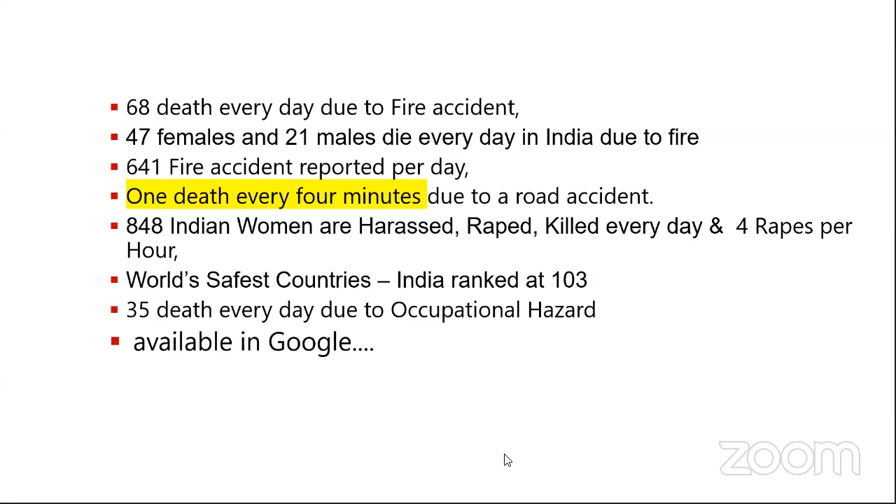And the worldwide deaths due to unintentional injuries are expected to grow by 56% between 2015 and 2030, from slightly over 3 million to almost 5 million people a year. It's estimated more than 90% of deaths worldwide that result from injuries occur in low and middle income countries.

So I always strongly believe safety should begin from home. So if you start implementing these safety plans in your home and emergency safety kits at home, then the country will prosper and the country will become a developed country.

Change should begin from you, ladies and gentlemen. And I'm sure since you are taking part in this webinar, you are a believer of that. No doubt, and ensure that whatever we learn today, it is practiced in our life every day.

Today we have our very important keynote speaker, Mr. V. Suresh, who is very passionate and is a civil engineer from Anna University with over 53 years of professional experience in housing, infrastructure, rural, urban development, and built environment sector. He is the current chairman of Indian Green Building Council and is the vice chairman of National Building Code. The awards and recognition are over 25 to 30, so I've just mentioned a few of them on the slide.

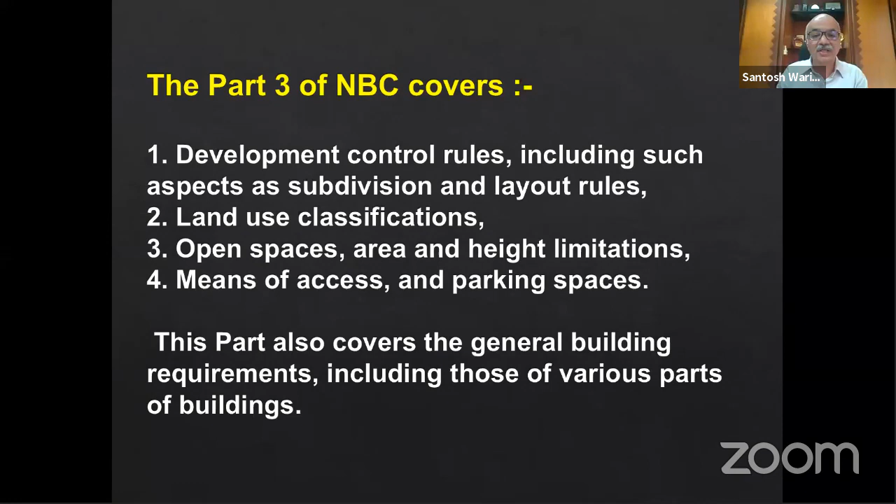The normal expectation of development control rules is to provide guidelines for town planning and country planning so that planned development is possible, so that various authorities working in urban areas get facilities for transportation, amenities, various types of occupancies, reservations. All this is planned by local authorities. The state government has authority as per the town planning acts of respective states to frame such guidelines. These guidelines originate from Part 2 and Part 3, as already highlighted by Suresh sir.

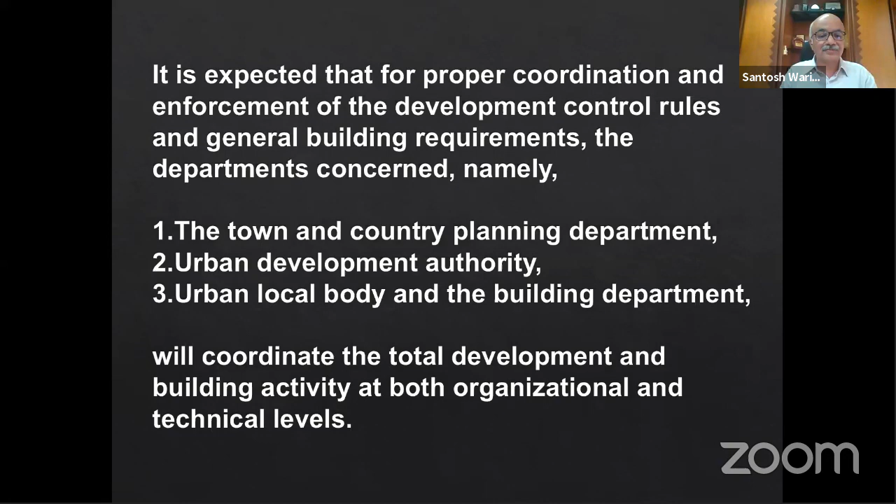The urban local bodies aspect is very important, so that resources available in the city can be accessed with ease, accessible from various strata - right from the poor to the rich, and from different age groups.

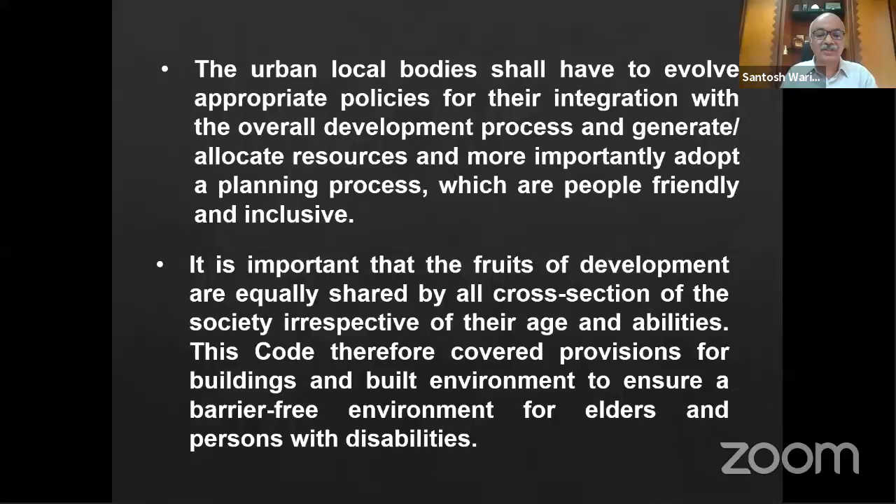Specifically in this new 2016 Part 3 edition, special emphasis is given on the barrier-free environment, built environment for physically challenged or disabled people, with guidelines as per international standards - ISO 21542, 2011 edition. Then the planning a barrier-free environment guidelines issued by Government of India, then harmonized guidelines and space standards issued by the Ministry of Urban Development in 2016.

All these guidelines are incorporated in Annexure B of Part 3 of the National Building Code, wherein barrier-free environment is created for all age groups and disabled people.

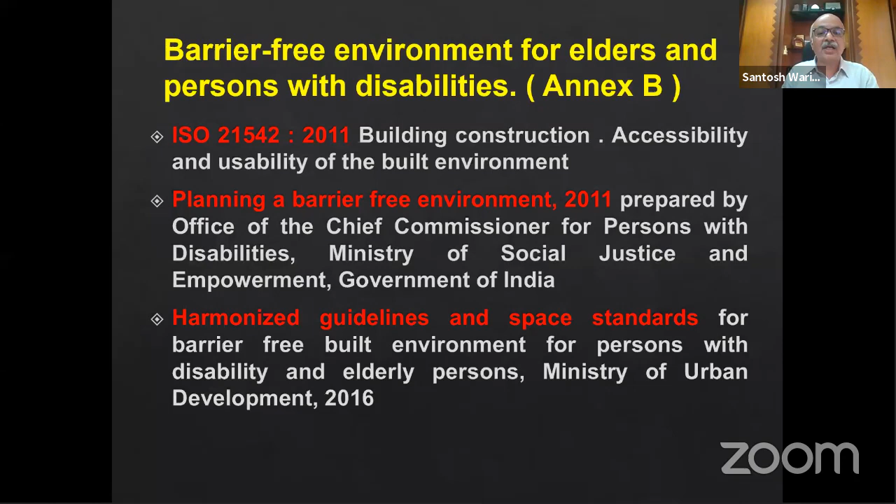Then an important thing nowadays - we are talking about various types of transportation modes, maybe bus rapid transit, metro rail, monorail, ring rail. These are provided or promoted by the state and central government for reducing carbon footprint, pollution levels, reducing automobile use in the city, to minimize environmental impact, and to improve livability and mobility within the city.

So these transit-oriented developments are happening by giving additional FSI around metro rails, monorails or bus transit areas, wherein you can have more parking spaces, more atriums, more common facilities, so it can be easily accessible through this connectivity.

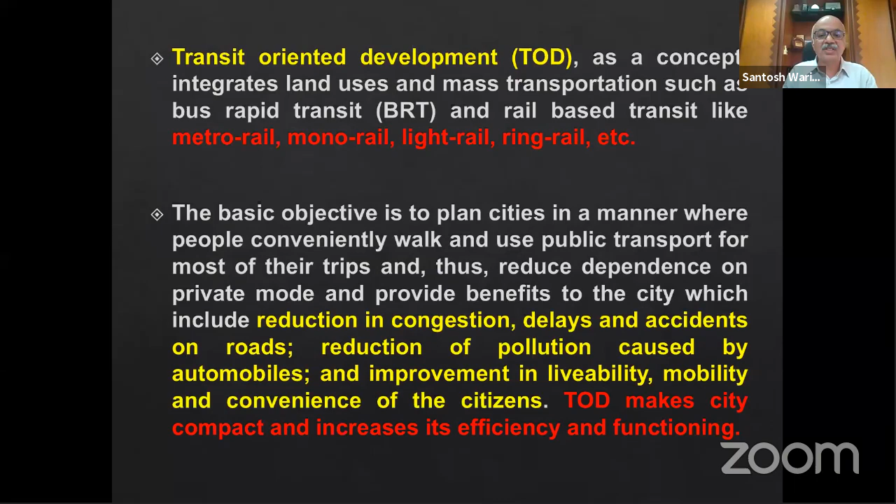Then rapid urbanization - if you see from the 2011 census, 31.16% growth has been seen in urban areas as compared to 27.8% in the 2001 census. And it is expected by 2021 it will be around 40%. So 40% of the population will stay in urban areas as compared to rural areas.

If you see the number of cities, there were 7,933 as per the 2011 census, which will cross around 10,000 in the next two decades. Already one decade has passed. So the population migration from rural to urban is a continuous process due to rapid urbanization and industrialization in the country.

If you talk about mega cities having population more than 50 lakh as per the standards, there are 8 such cities. Other metros, mini metros, with 10 to 50 lakh population, number 45, and 53 cities having above 10 lakh population by 2021 - meaning 53 will come to around 70. These are predictions made considering the urbanization happening across various parts of the country.

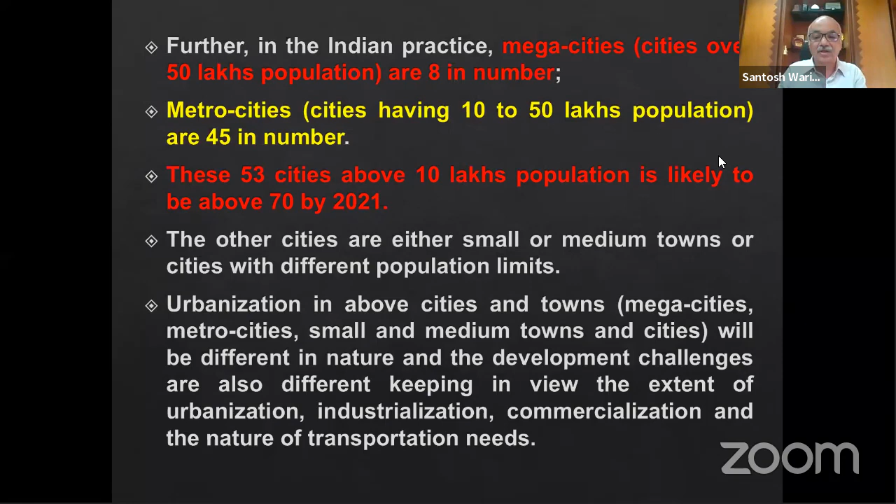So what are the key features already highlighted by Suresh sir in his keynote address - various new things included in this Part 3. The definitions of various terms have been modified. The land use classification has been modified. The provisions of transferable development rights.

This is very important when talking about new infrastructure coming up like metros, underground metros, or other facilities. If the land belongs to some individual person who owns it, and we want that facility on his land, then you have to give him some benefit so that he can use that benefit somewhere else. So every urban local body gives such transferable development rights so the person can utilize it at another place.

The provisions of the podium, which is very important from the metros and mini metros point of view, where parking is a major issue.

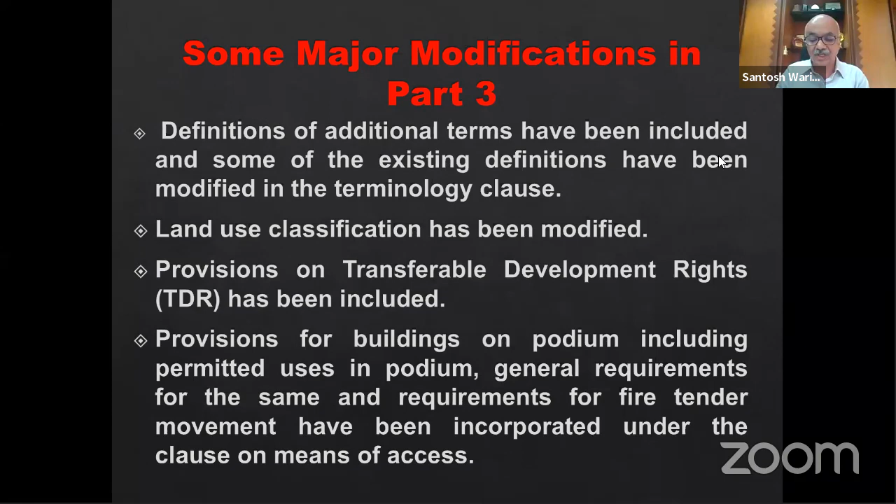Along the metros or monorails, public parking areas are encouraged. So this kind of multi-level car parks and podiums requirements are coming up, and provisions for the movement of fire tenders on and around the podium are incorporated.

The planning norms, new norms, are incorporated. The minimum clearance from overhead electrical lines as per the Central Electricity Authority Regulations 2010 has been incorporated.

Various ventilation, light and ventilation requirements for basements are provided in this part. Then height restriction in the vicinity of aerodrome, that is approach to and departure from the airport - the restrictions within the funnel are given as per the civil aviation guidelines.

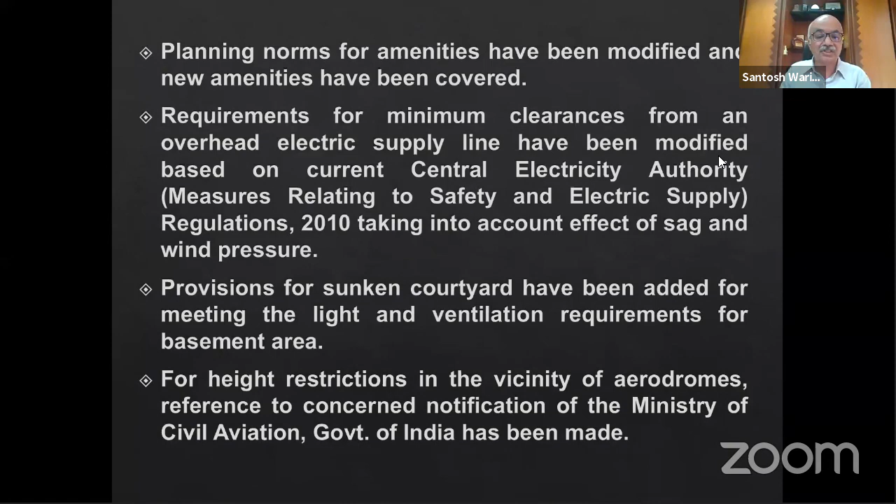Then the provisions for mechanized parking, various types of parking, are provided. Basement use is again modified. The accessibility to the building for elderly persons and disabled persons, that I have already discussed. Solar energy utilization is also included.

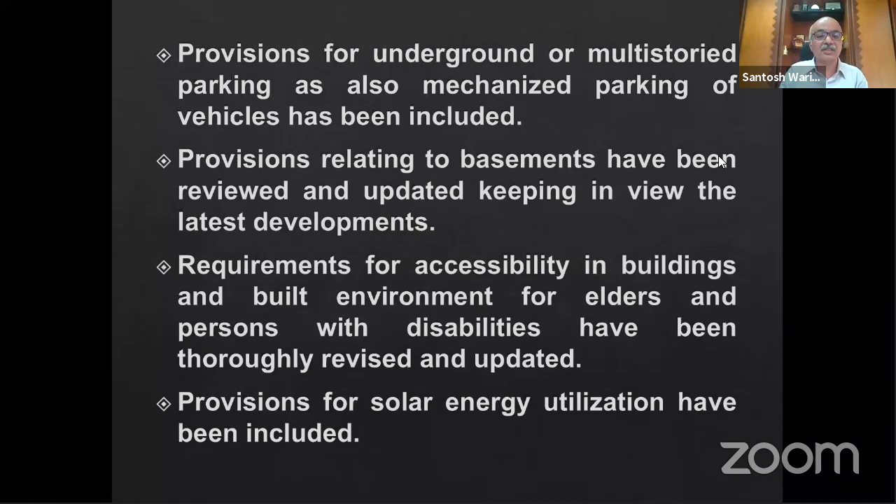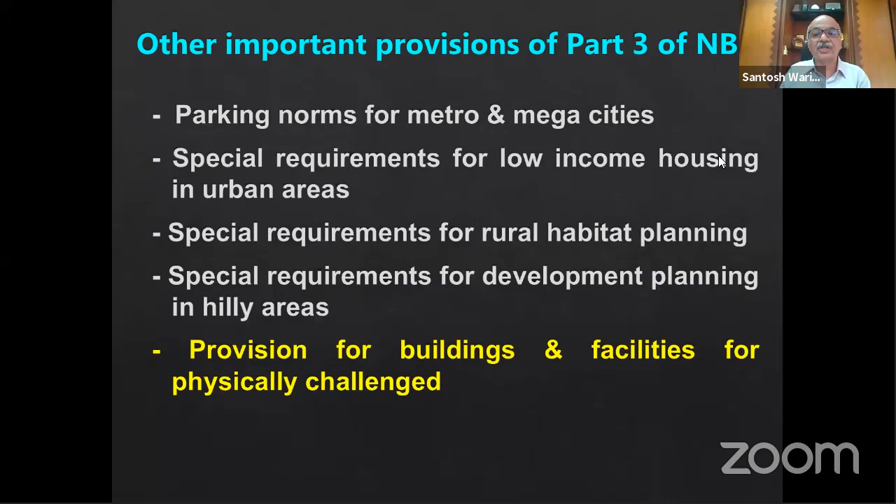Another feature is in the annexures. They have included low income housing in urban areas, requirements for rural habitat, and requirements in hilly areas. So these annexures are also incorporated in Part 3 of the National Building Code.

Now we will see the basic terms used in Part 3. The Authority Having Jurisdiction, AHJ - this is an important feature. It means that by statute, a body has been given powers to regulate development, through acts like the Fire Act, development control rules, or the planning authorities. That is identified by the code as the authority having jurisdiction, and they regulate any development in that particular area.

Then the definition of building height, which is normally measured as the vertical distance from the average ground level to the flat roof or terrace. In the case of a flat roof, how it should be measured is also clarified in this definition.

Then development, which is very important from all disciplines - it is a grammatical variations meaning to carry out building, engineering, mining or other operations in, over, or under land or water, or the making of any material change in the building or land or in the use of any building or land. It includes redevelopment, layout or subdivision of any land, and 'to develop' shall be construed accordingly. This is very important - it covers everything, including below land and below water. So this definition is very clear for development.

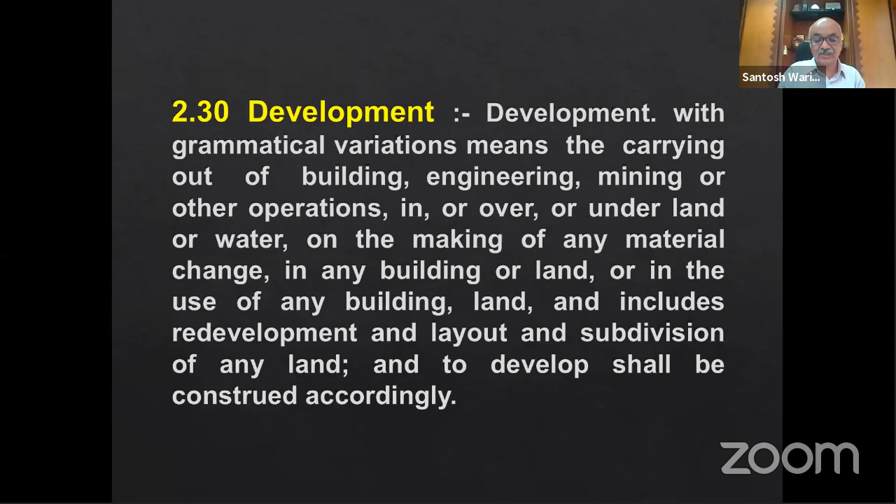Then fire separation, from the fire safety point of view, is very important. Normally architects are taught that the distance between buildings or marginal spaces is required from a light and ventilation point of view. But from the fire safety point of view, as an exposure hazard, it is very important to create distance between two buildings. This distance is measured from the external wall of one building to the external wall of another, so that in case of fire, no radiant heat can pass from one building to another - or in case of industrial explosion, or even residential LPG cylinder blast, it should not affect the opposite or adjacent building. That is specified as already explained by Suresh sir.

Floor Area Ratio, FAR, is given as the total covered area of all floors divided by the plot area. That is the index or code noted as FAR or FSI.

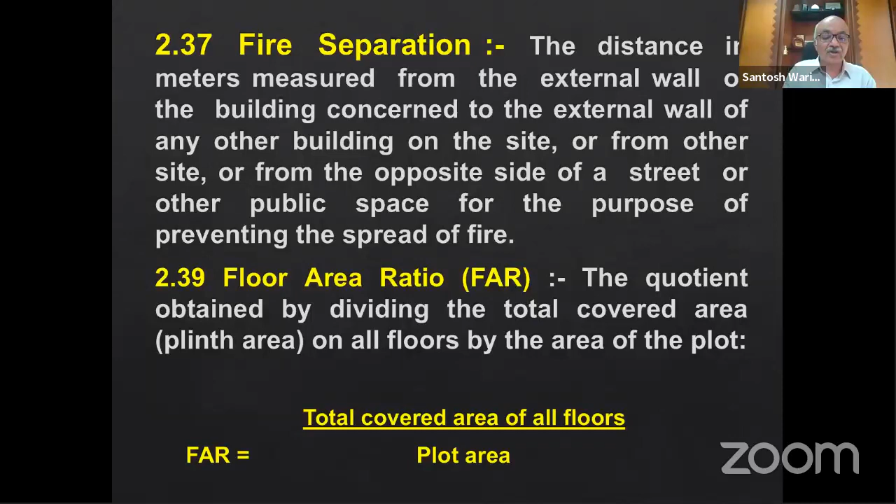The master plan is very important for any town's future development over 10, 20 or 30 years. Considering all development, the master plan is prepared and the state government approves it once published for suggestions and objections from citizens. These suggestions and objections are considered from citizens or expert groups working on the master plan, along with city or town planners, and then the government approves it, and development is carried out as per the approved plan. That is the normal process under any development plan or municipal body.

Every city has got its own development plan, and on the basis of that only the development happens. The occupancy uses are already there in National Building Code Part 4, which provides various occupancies, 9 occupancies and their uses and subdivisions. Similarly, the same is incorporated here. Mixed occupancies are multiple occupancies wherein the occupancies are intermingled, like a mall or a five-star hotel where you have business centers, assembly places, and residential accommodations all together.

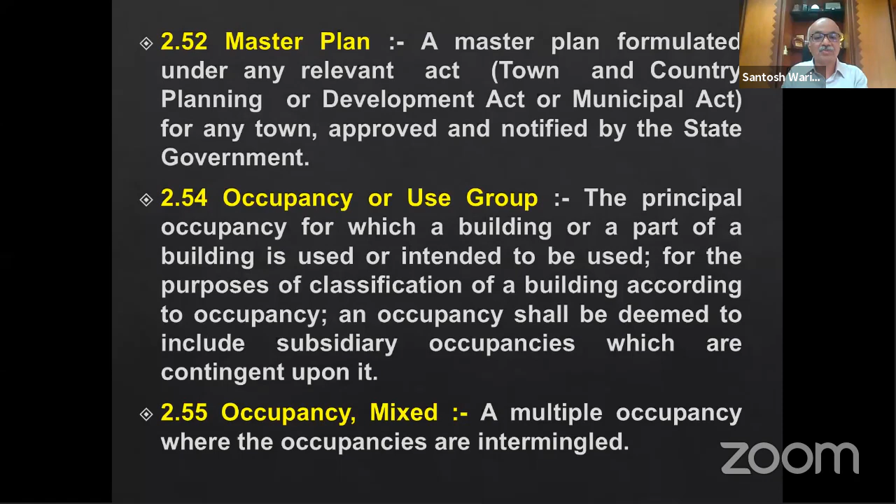Then the plinth area is the built-up covered area measured at every floor level, including basement. So that is basement or any other storey, that is called the plinth area. Setback lines are the lines usually parallel to the plot boundary and laid down in each case by the authority, beyond which nothing can be constructed. So that is the setback area.

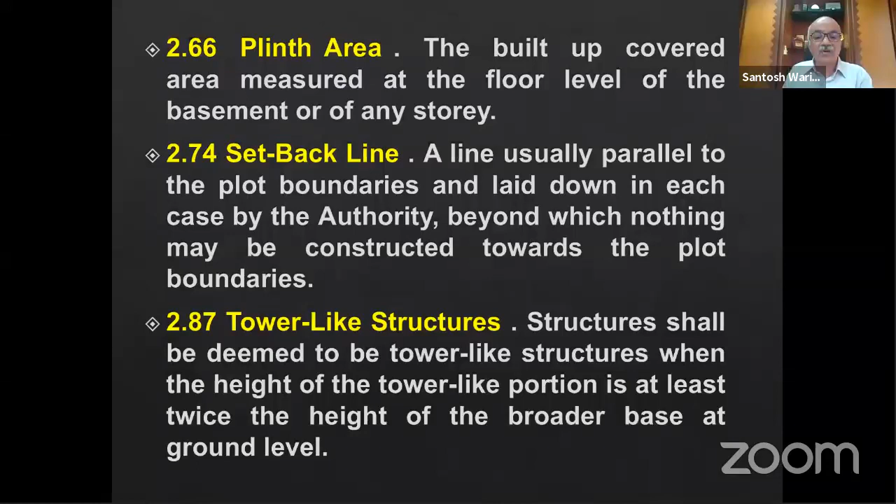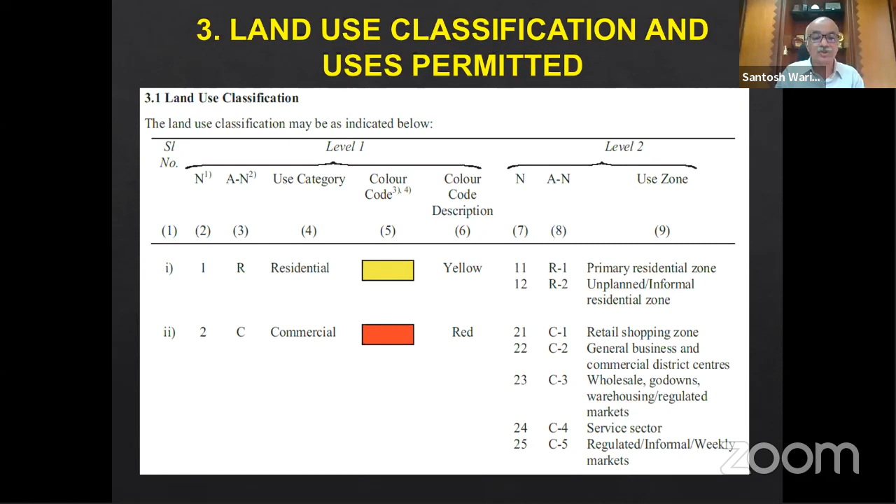Whoever prepares the master layout will show residential in yellow, commercial in red - the primary residential zone, and retail shopping, general business provisions, wholesale, godowns, service sectors shown as commercial in red. Then industries shown in light purple color - light industries, heavy industries, and obnoxious industries - scattered as per the zoning of the city, that is Zone 1, Zone 2, and Zone 3 as provided in National Building Code Part 4.

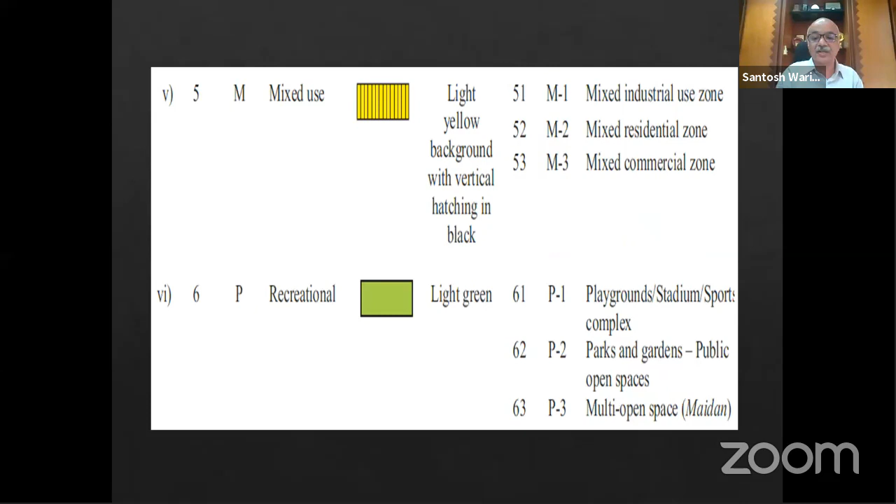Then public and government buildings as dark blue land use. Mixed use is provided with light yellow and vertical hatches - mixed use industrial, mixed use residential, mixed use commercial. Then recreation activities in light green - playground, parks, garden, open spaces. Then transportation and communication with brown and gray - road, bus stations, railway stations, seaports.

Then primary dark green - agricultural or forest areas. Then light blue color for water bodies, lakes, and everything shown in light blue. Special areas are provided with pink color, for heritage activities and government restricted areas such as defense areas.

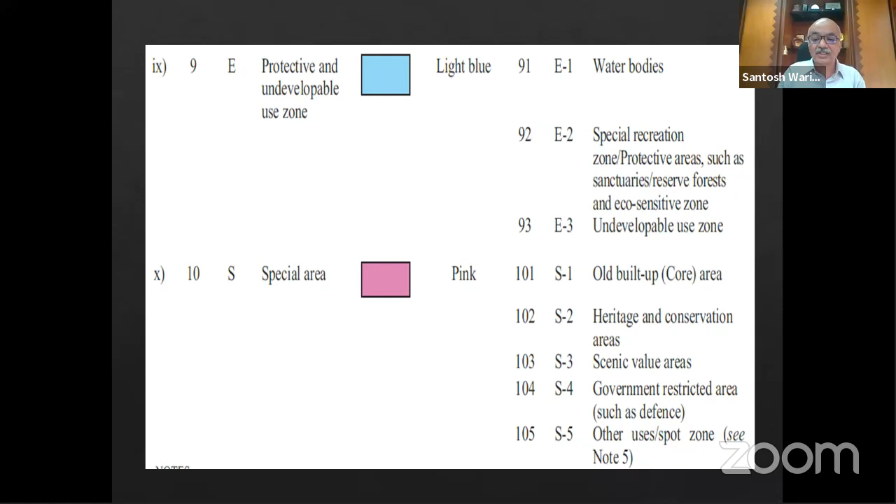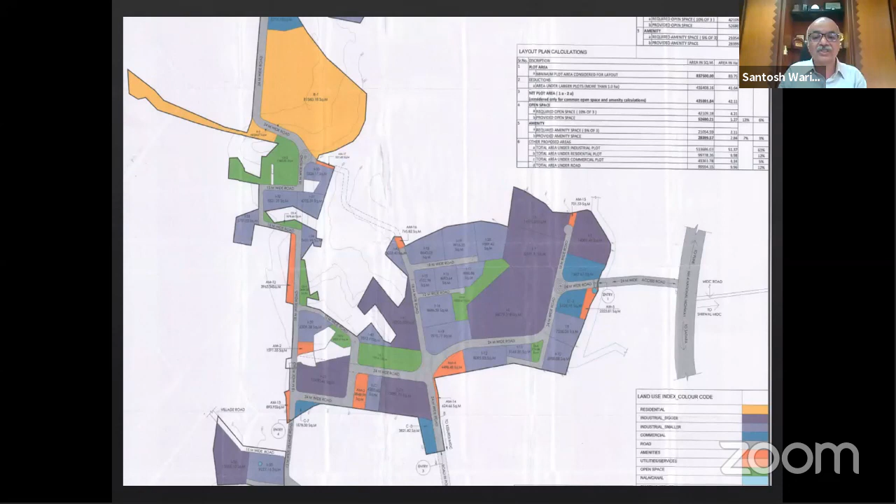So this is normal - if you have a land parcel, you can show residential, commercial, green activities, and various amenities based upon the road infrastructure accessing each and every plot. The state government can approve this, and you can carry out development as per the reservations. So this is the example of how plots can be reserved for various types of occupancies or activities.

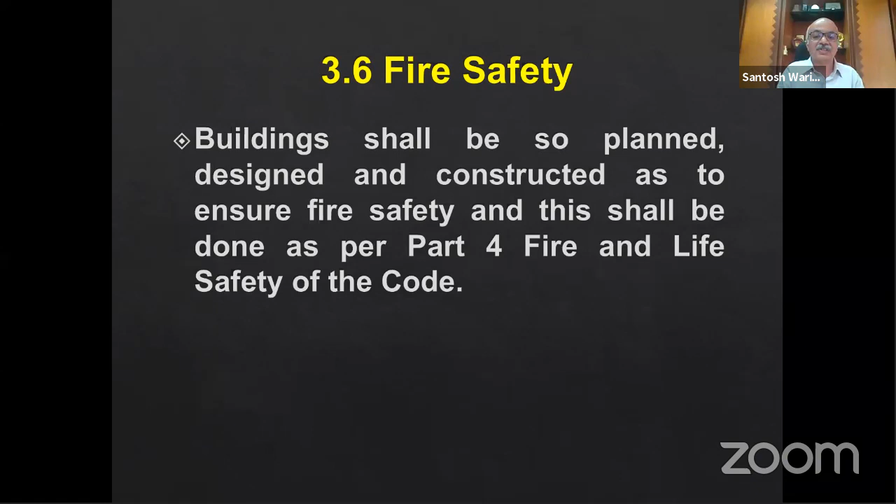Then the fire and life safety clause 3.6 gives cross reference to National Building Code Part 4 for fire and life safety, for all other means with reference to fire and life safety activities. Then clause 4, means of access - this is very important. Every plot should have access from the public ways and from the main street, so that it can be accessible for various daily purposes or use purposes.

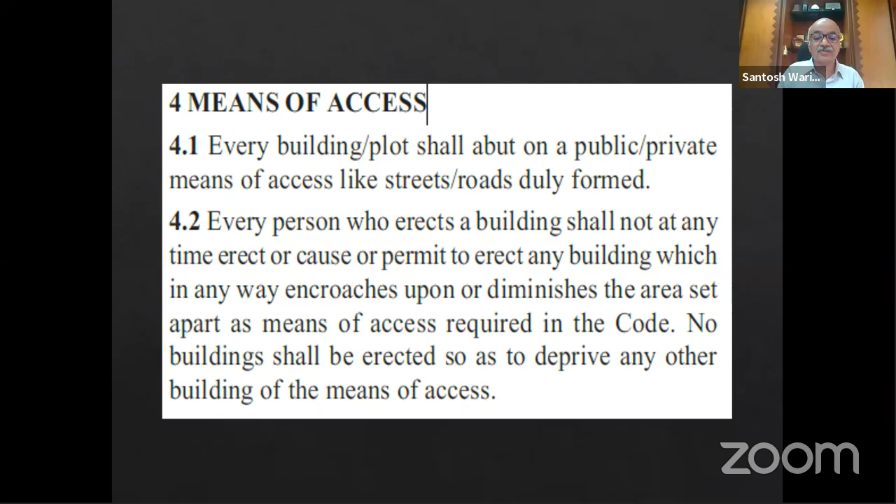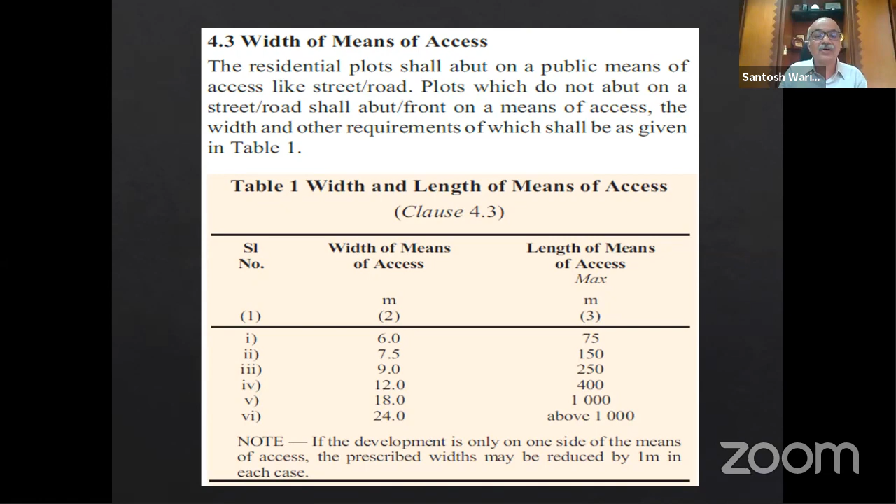This code provides various provisions with reference to residential and other buildings. For residential buildings, the minimum width of the means of access is provided as 6 meters to 24 meters, and the length of means of access is also provided in Table 1, which specifies the maximum length of the road and width of the road. That is specified in Table 1 of Part 3.

Then clause 4.3.1 is for other buildings like assembly, theater, cinema house, assemblies, and educational buildings, wherein the minimum width is specified as 12 meters and length as 200 meters, then 15 meters and 400 meters, 18 meters and 600 meters, and 24 meters and above 600. So these are the minimum road widths specified for various types of activities.

So you should have minimum that much road width around for approach. Then access from the highways - if your plot is abutting on the highway, then only certain activities are allowed, like petrol pumps and motels. If other things are there, a service road should be provided along with the highway, and access shall be provided from that service road.

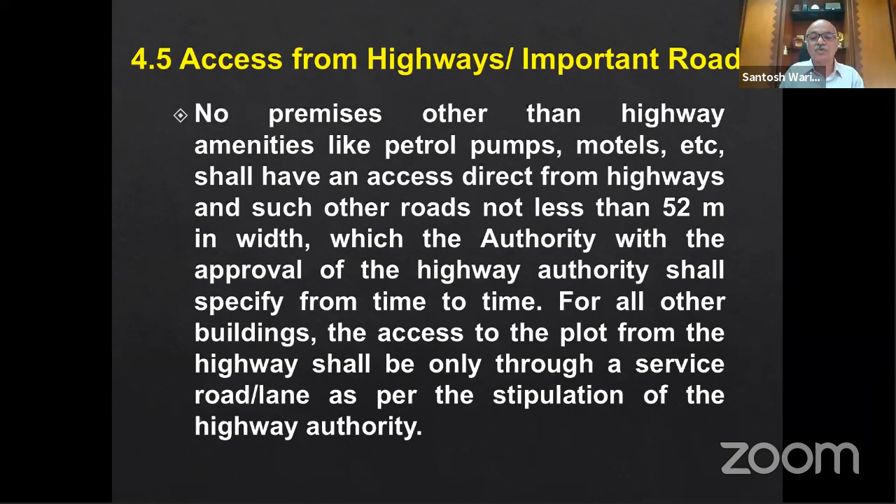Then for high-rise buildings, this is a very important provision from fire and life safety point of view. Clause 4.6 provides that in addition to National Building Code Part 4 requirements, the width of the main street on which the building is abutting shall not be less than 12 meters, and one end of such road shall join another street not less than 12 meters. This is very important from fire and life safety for the circulation of ambulances and fire appliances in case of any emergency for carrying out evacuation.

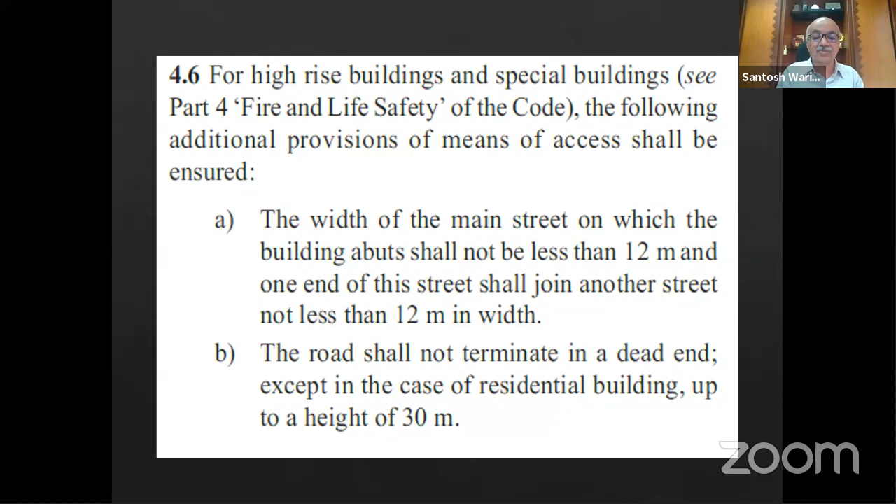The road shall not terminate in a dead end, except in case of residential buildings up to a height of 30 meters. So there is a restriction - if it is a dead end, you cannot have the building height more than 30 meters if your road is having a dead end.

So again, Clause C provides very important provisions. Approach to the buildings and open spaces all around the building shall not be less than 6 meters, with turning circles of 9 meters. So we provide only 6 meter marginal space requirement as per the various codes or Fire Act.

But the major issue is the turning circle. Your big vehicle cannot turn in 6 meters, so you need a minimum 9 meter turning circle at the corner of the building. So that is a very important provision.

Also, the various services are housed in the marginal open space, like sewerage treatment plants, water tanks, etc. So that should have the capacity to hold the 45 ton point load, so that in case of emergency, the aerial ladder platform can be pitched in the marginal open space for carrying out external firefighting and rescue operation. This is a very important provision from the fire and life safety point of view.

Then there is a provision given depending upon the availability of the fire services. The plan approval and the access requirement can be approved by the local fire department, the chief fire officer of respective cities. They are empowered to do that.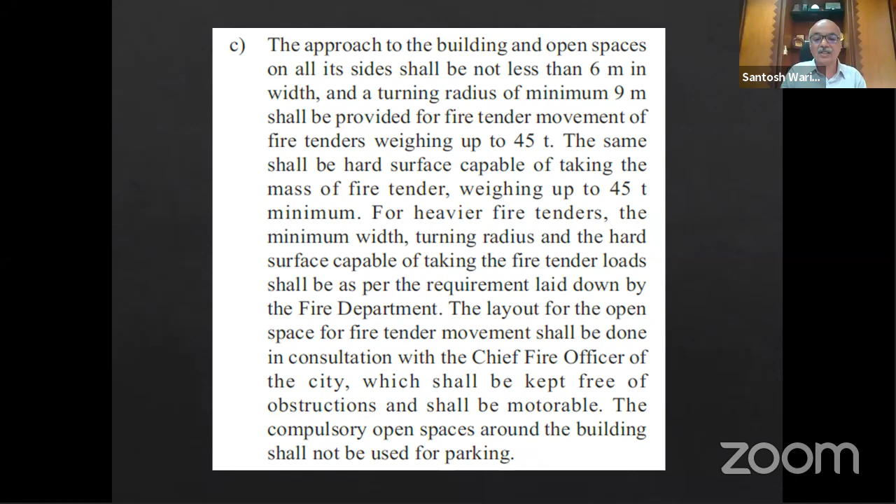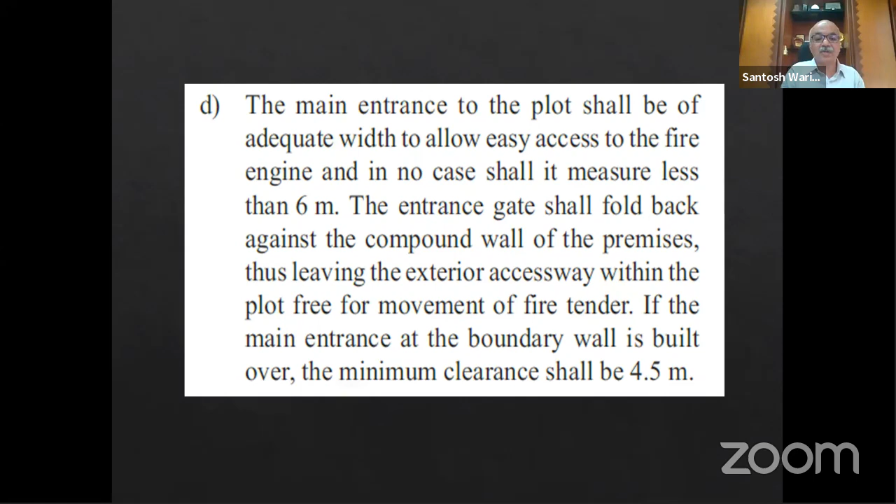The main entrance, this is also very important, shall not be less than 6 meters in width. And if the compound has a gate or arch above it, a clearance from the entry point should be minimum 4.5 meters, so that a vehicle can enter easily within the plot. So from a fire and safety point of view, this is very important.

The concept of podium is upcoming in various metros, where podiums are provided for parking purposes. So for the first time, with clear diagrams, clause 4.6.1 provides the concept of podium. It is a horizontal projection platform extended beyond the building line, and you can utilize it for various activities like parking.

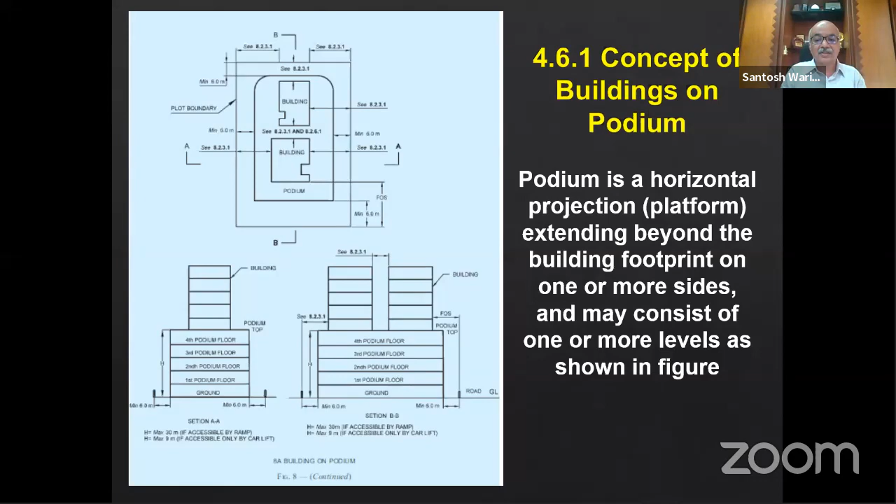Use permitted, first is the parking. You can use the parking, and the related services like WC, urinals and wash basins are provided for 500 car parks. Then there is a provision for the driver's restroom in the non-residential building. Fire and building utilities can also be housed. Then landscape can be created on top of the podium, with a parapet wall of 1.6 meters.

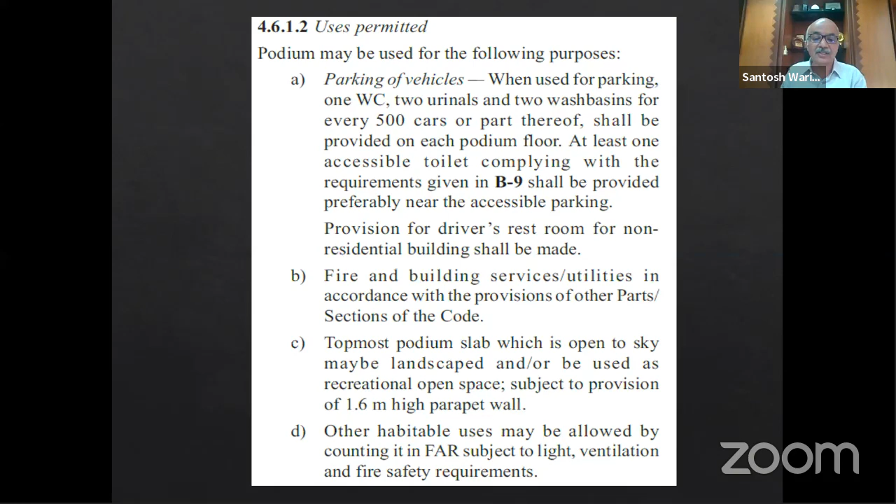And if any commercial or other use is created, then it should be counted in FSI. So the requirement specified is that the podium may be permitted for plots above 1,500, which is very important. If you want to keep a minimum 6 meters space from all sides, then there should be a minimum plot size required to have the podium.

Then, if ramps are provided for the podium, the height of the podium shall not exceed 30 meters from the ground level. In case the podium is not provided with a ramp, only with a car lift, then its height should be restricted up to 9 meters from the ground level. So these are the restrictions given in the code for the podium.

Then the ramp requirements are given for vehicles. A one-way ramp should have a clear width of minimum 3 meters. If it's a two-way ramp, then 6 meters for light motor vehicles. Then 4.5 meter single way and 9 meters two-way ramp for light commercial vehicles.

And if the ramp is used by heavy motor vehicles, in that case minimum 6 meters ramp should be provided, and if two-way, then 12 meters clearance. The slope shall be maximum 1 in 8 as proposed in the code. After every 40 meter length, there should be a minimum flat surface of 6 meters length, as given in figure 8B.

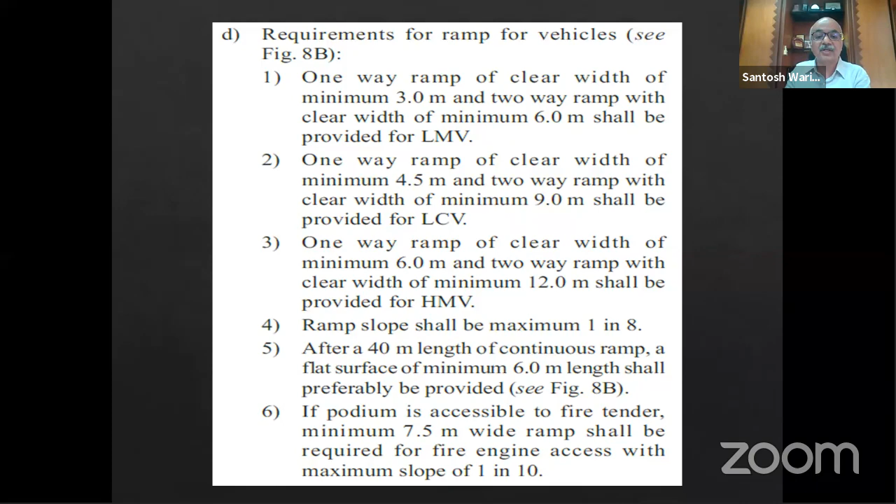If the podium is accessible by fire tender, minimum 7.5 meter width ramp shall be required for the fire engine, and the maximum slope is recommended as 1 in 10. So these diagrams provide the requirements for one-way and two-way ramps, and also the turning circle requirement for ramps accessible by fire tenders.

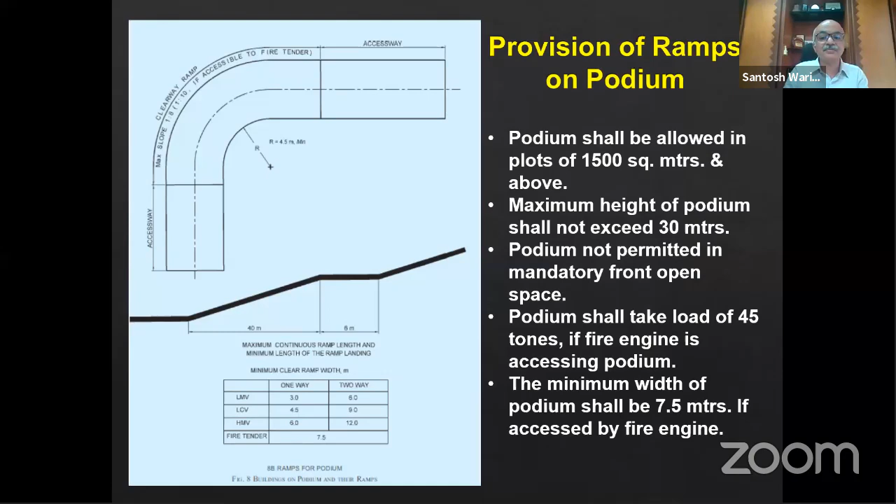The podium shall not be permitted in a required front margin space. Front margin spaces are normally utilized for any future development by the urban local body or the regulatory authority for carrying out services. So in such cases, the podium shall not be permitted.

Then the podium, if accessible by the fire tender, it should take a load of 45 tons minimum as per the requirement of the fire department. Point load should be there so that external firefighting and rescue work is possible from the podium. As already told, the podiums and everything should be accessible by the elderly and disabled persons, so those provisions are provided in Annex B of Part 3.

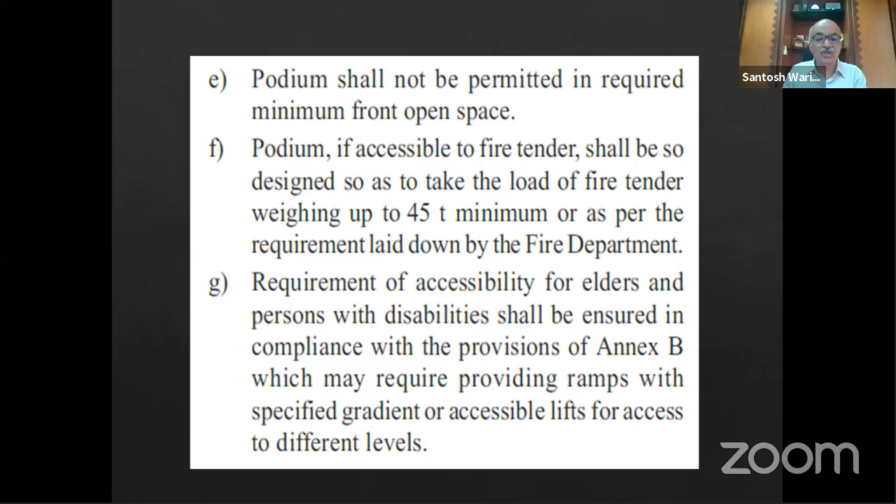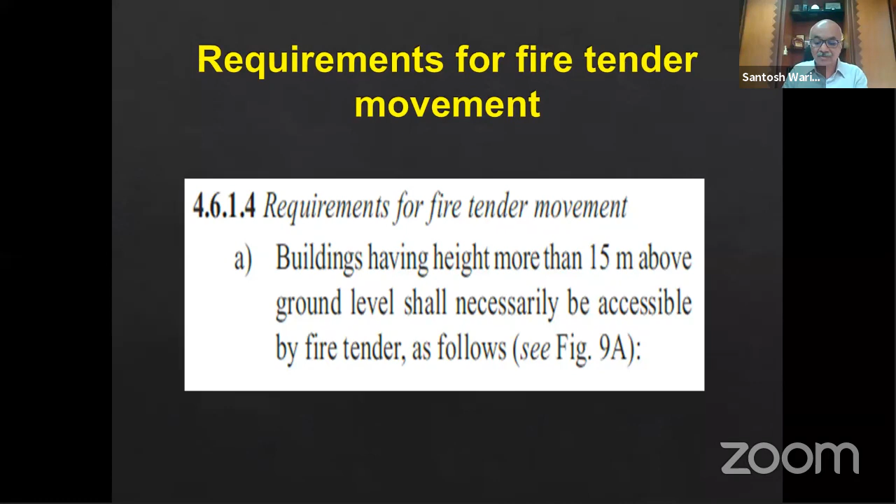It is normally recommended that if the building total area is up to 10,000 square meters, then it should have two-thirds of the periphery accessible. And if it is more than 10,000, then it should be half the area, meaning 50% of the external surfaces should be accessible for the fire tenders from the ground level. So these guidelines are provided for fire tender access with podium.

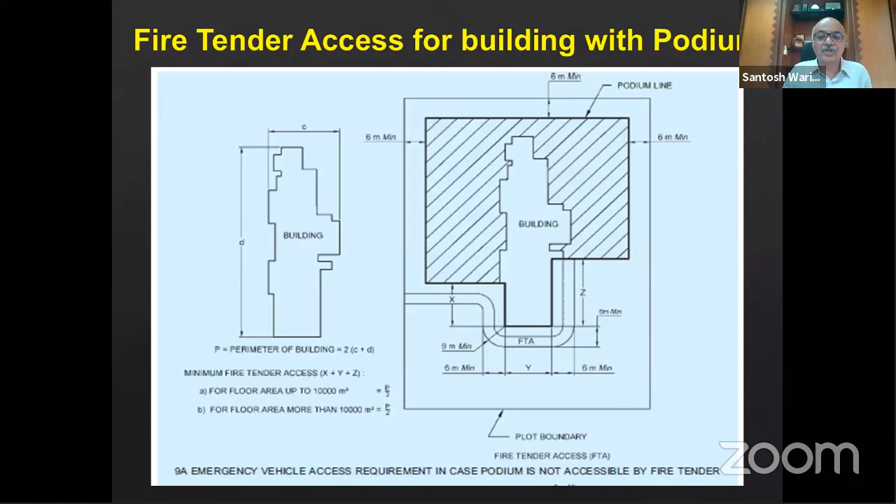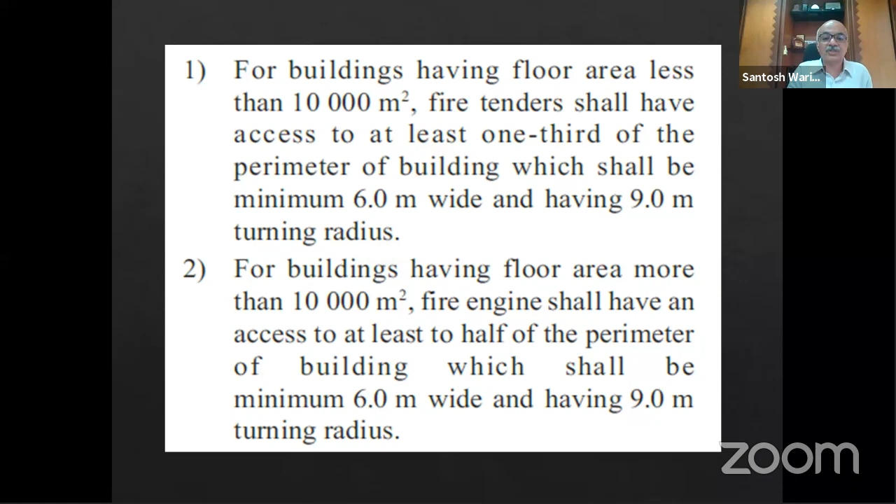If podiums are not accessible by the fire tender and building footprints are beyond that, then also a minimum 6 meter driveway and 9 meter turning circles are recommended in the drawings, as we will see. This we have already discussed: the requirement up to 10,000 square meters and beyond 10,000 square meters.

This is another drawing provided, wherein projections of the podium are beyond the building line, and there is a restriction given. If you see this, from the building line to the podium line, there should be a maximum distance of 11 meters. This distance should not be more than 11 meters on any side of the building, either on the front, sides, or the back.

So you should have clear access made available for the fire tender to have external approach to the building. That is a restriction, and for the rest of the area you can have a podium of more than 12 meters.

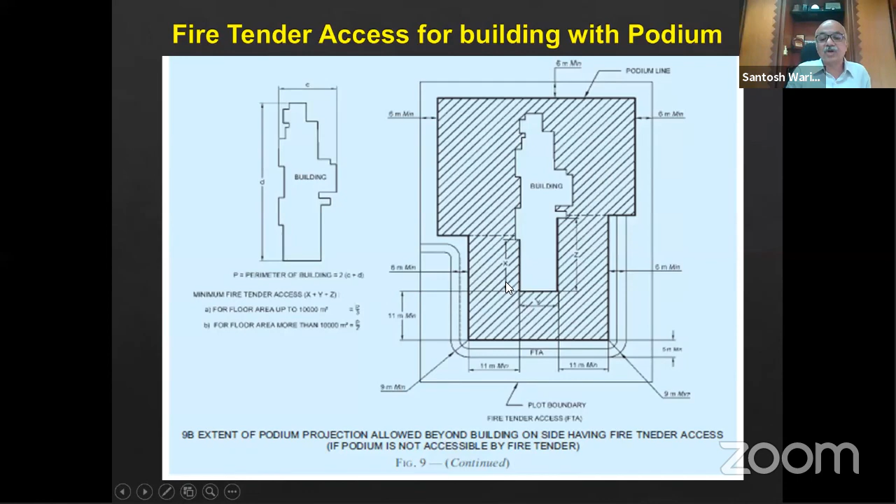But at least in 50% of the area, there should be clear access provided around the building with a 6 meter approach road and 9 meter turning circle requirement. On the podium, from the podium line to the building line, it should not be more than 11 meters. So this is the requirement provided.

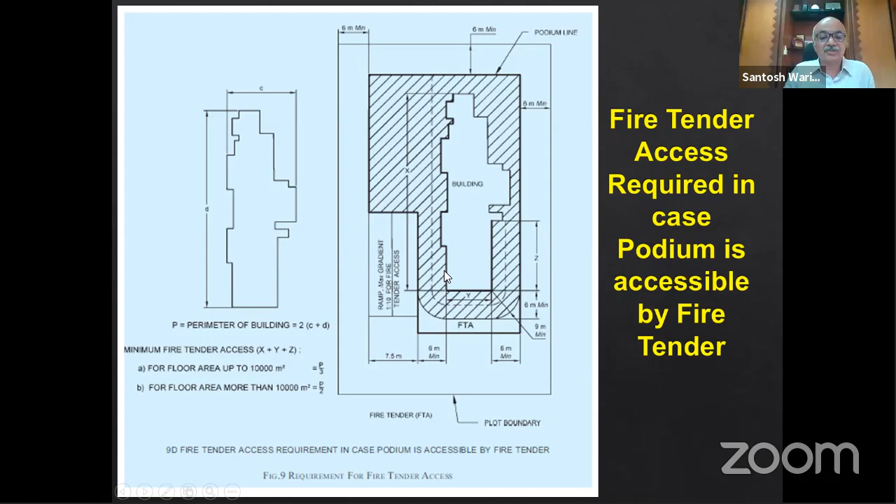If the fire tender is accessible by accessing the podium level, in that case the ramp should be a minimum of 7.5 meters. This ramp is proposed for fire brigade access, and the fire brigade vehicle can reach the podium level, with circulation made available on the podium up to 6 meters with a 9 meter turning circle, so they can access various parts of the building. These provisions are provided for the podium.

This is a very good diagram provided in Part 3, showing that if your building is abutting the external side of the podium, you can reach the upper levels. External firefighting and rescue is very much possible from the external side easily with the aerial ladder platform. We now have up to a 90 meter aerial ladder platform we can reach.

If the building is inside the podium line, that distance shall not be more than 11 meters, so the vehicle can be pitched parallel to the podium and reach up to a certain height in case of emergency for carrying out firefighting and rescue operations. So this is the diagram.

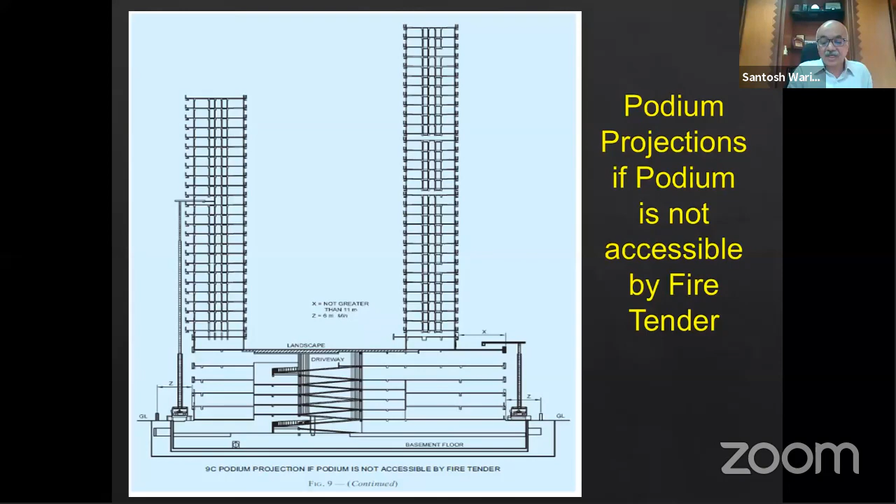If the podium is not accessible with fire appliances, then the arrangement should be made like this. These are, as we have already discussed, various amenities provided in Part 3. Some amenities I have highlighted over here. This is the educational ones, where the land requirement for 2,500 population is 0.08 hectares.

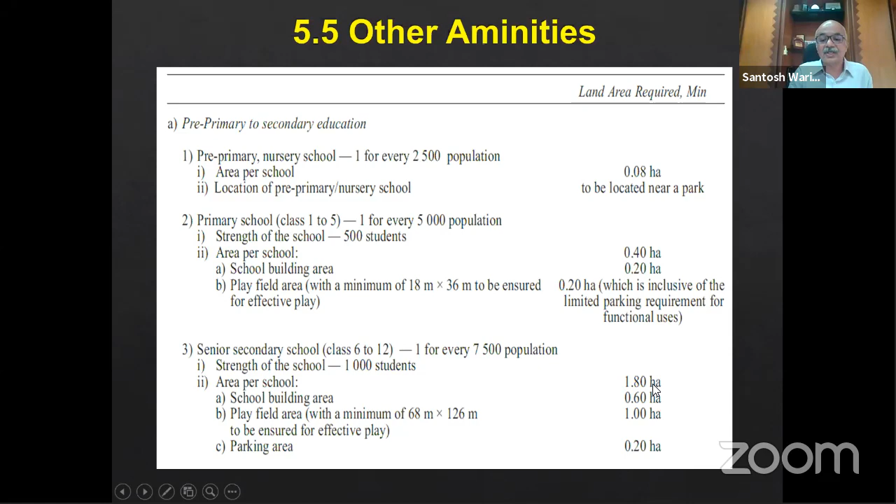Then for the primary school, from first grade onward, for every 5,000 population and 500 students, 0.40 hectares is recommended. For every 7,500 population, for class 6 to 12 with 1,000 students, 1.80 hectares are recommended.

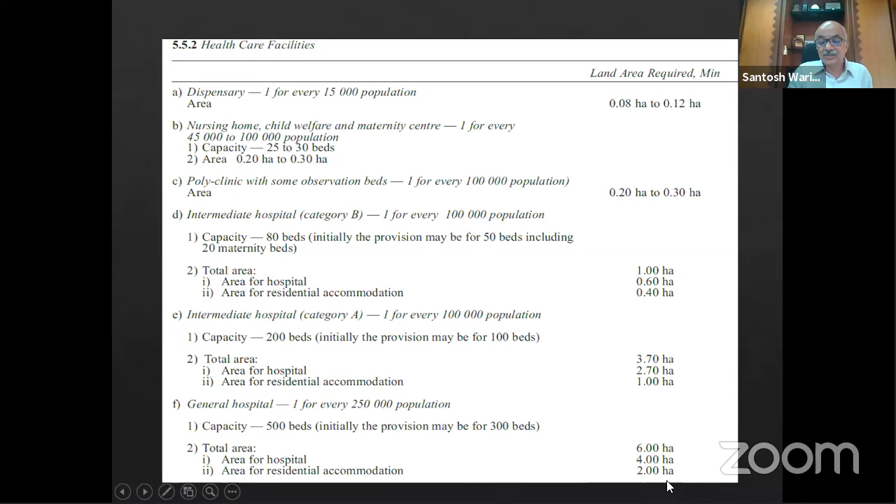Healthcare facilities, also dispensaries for every 15,000 population, then the area required for nursing homes, then for hospitals, general hospitals for every 250,000 population with a capacity of 500 beds, minimum 6 hectares of land is recommended. For other hospitals, 4 hectares, and residential accommodation 2 hectares are recommended in the code.

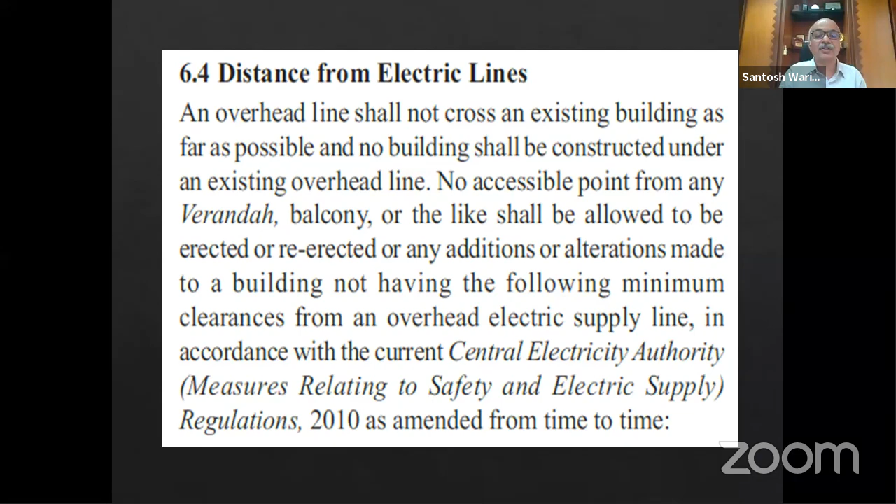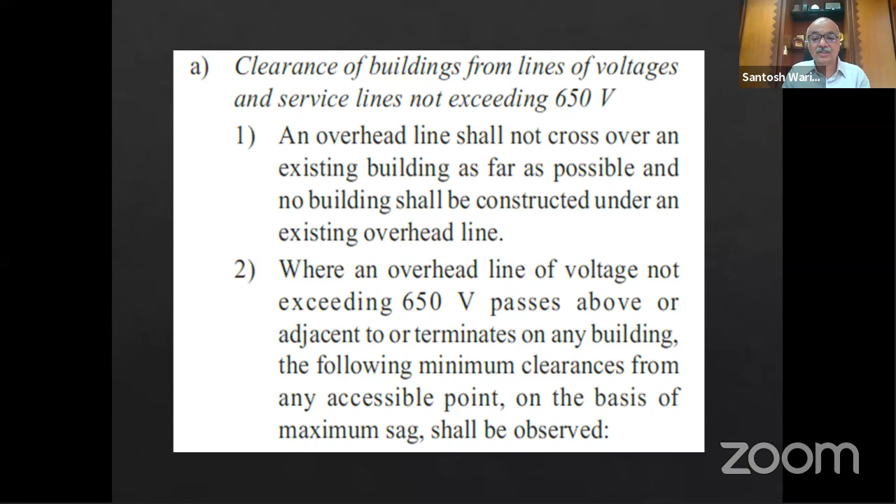Clearances for 650 volts are specified in the code for various residential and other buildings. For flat roofs or open balconies and verandas, the minimum vertical distance should be 2.5 meters from the highest point, and horizontal clearance adjacent to the building should be minimum 1.2 meters. For pitch roofs, again vertical distance of 2.5 meters immediately under the line, and horizontal clearance should be 1.2 meters if voltage is up to 650 volts. The horizontal clearances shall account for the maximum deflection in case of wind pressure.

That new feature has been incorporated into these provisions. In case of gushing winds, if deflection is happening, that has to be calculated. Then a second requirement is given: if the distances are less, it should be properly insulated and have breaking strength of not less than 350 kgs.

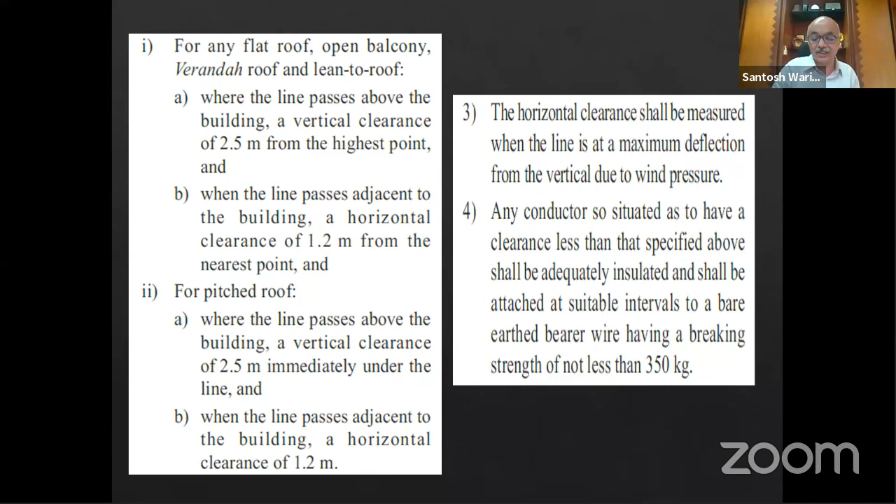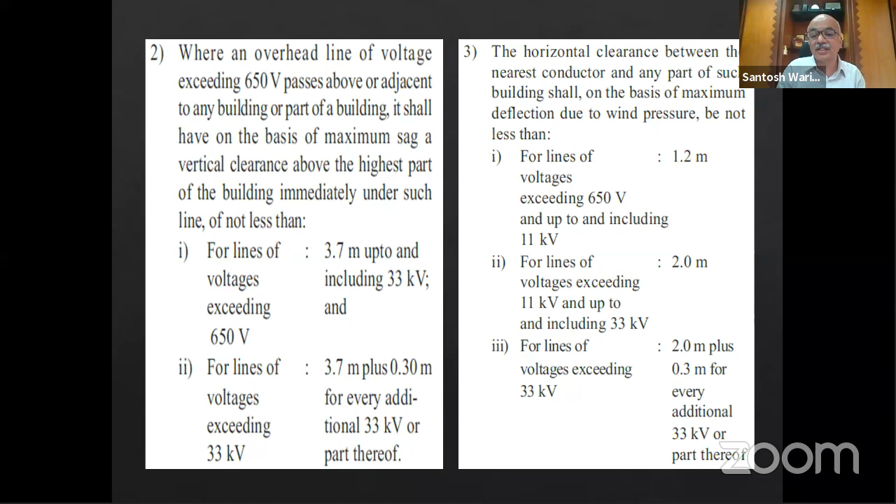If voltages are more than 650 volts, requirements increase up to 3.7 meters, and for every 33 kV, 0.30 meters should be added. Horizontal distances for voltage exceeding 650 up to 11 kV is 1.2 meters. If it goes from 11 kV to 33 kV, distance should be minimum 2 meters. And if it goes beyond 33 kV, then 2 meters plus 0.3 meters for every additional 33 kV.

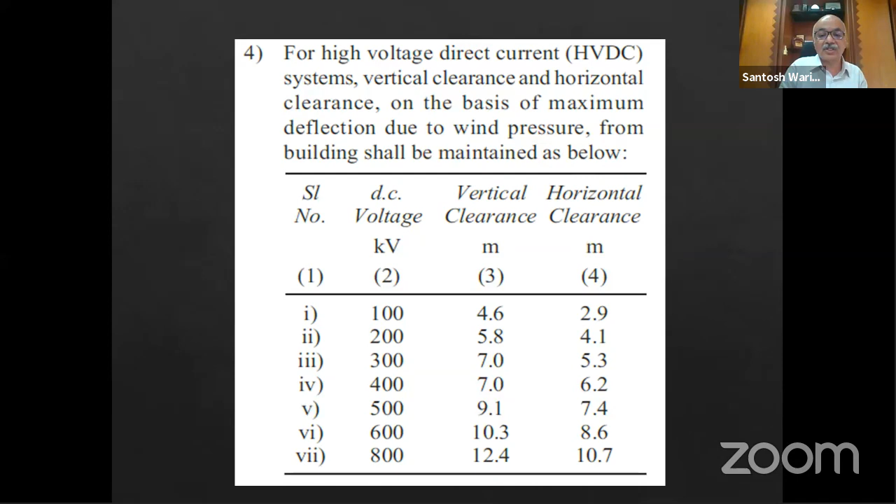As already mentioned, classification of buildings is very important depending upon use, to restrict the fire load and provide minimum fire protection requirements, specified with reference to Part 4 of the National Building Code. Type of construction is also specified with reference to Table 1 of Part 4, wherein type 1, type 2, type 3, and type 4 construction are recommended. Type 1 is 4 hours fire resistance, type 2 is 3 hours, type 3 is 2 hours, and type 4 is 1 hour fire rated. These guidelines are given in Table 1 of National Building Code Part 4.

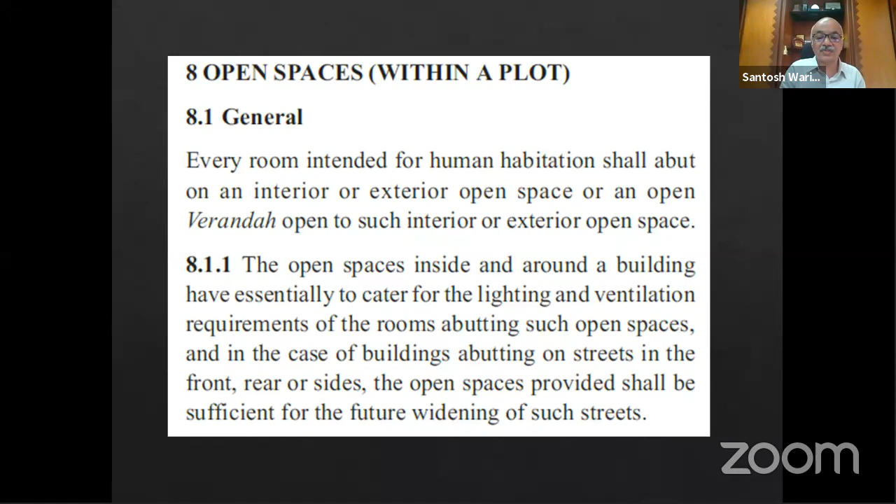Another very important feature, cross-referenced from National Building Code Part 4, is fire and life safety related to open spaces. Every room should have internal or external open spaces for daylight and ventilation, to have proper livable or working spaces. Considering that, various provisions are made.

With reference to residential buildings and building height, the normal thumb rule is height divided by 3, applicable in Table 4, wherein side and rear open spaces are specified. For a building height of 15 meters, minimum open space should be 5 meters. For 18 meters height, 6 meters. For 30 meters, 10 meters. For 50 meters, 14 meters. For 70 meters, 17 meters. For 120 meters height, 18 meters open space, and above 120 meters, 20 meters. These are the guidelines given in this table from the light and ventilation point of view.

As we have already discussed, it is very important from the exposure hazard point of view, and also for the circulation of fire appliances for external firefighting and rescue operations.

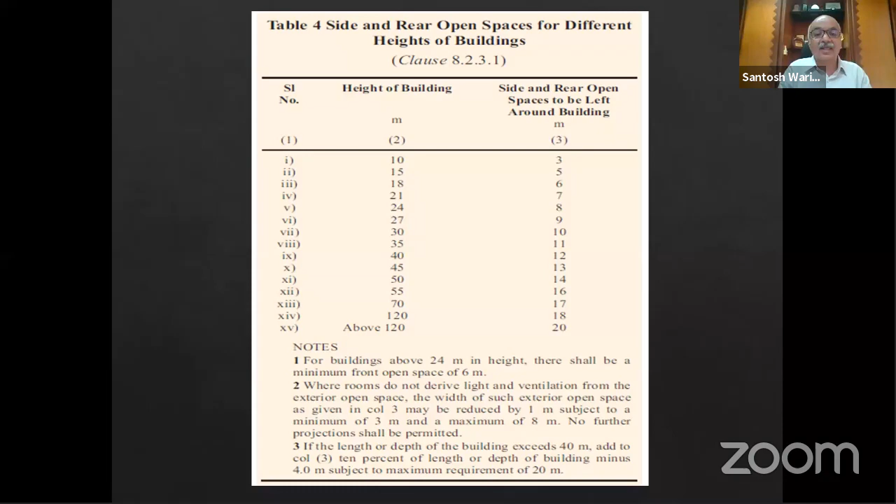For a tower-like structure, this is again a very important point for development. If the building height is 24 meters, you can have a minimum 6 meter clear margin space at ground level, and take one setback to compensate the remaining marginal space requirement.

In case of a 24 to 37.5 meter building, you can have 9 meters at ground level and one upper level setback. If the height is between 37.5 meters to 70 meters, you can have two setbacks, but minimum ground level should be 12 meters.

If the building height is between 70 and 120 meters, with two setbacks, you should have a ground level minimum of 14 meters, with remaining marginal spaces on the two setbacks. Beyond 120 meters, you should have minimum 16 meters at ground level, with the remainder on two setbacks.

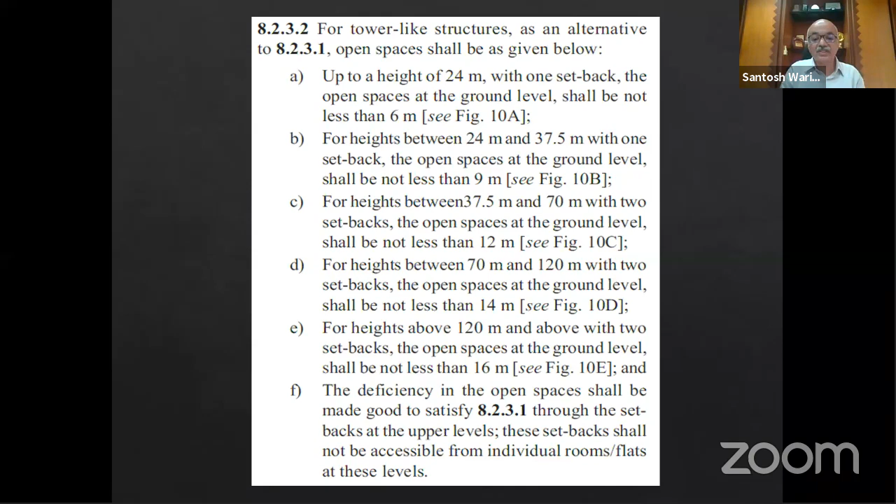So these are the guidelines given in the code, properly explained with diagrams. Up to 24 meter building height, you can have minimum 6 meters at ground level, with remaining setbacks taken at the upper level, like a temple-like structure.

This is very useful as an open terrace also, for temporary refuge till you get support from the fire services in case of emergency. These setbacks can be utilized for that purpose.

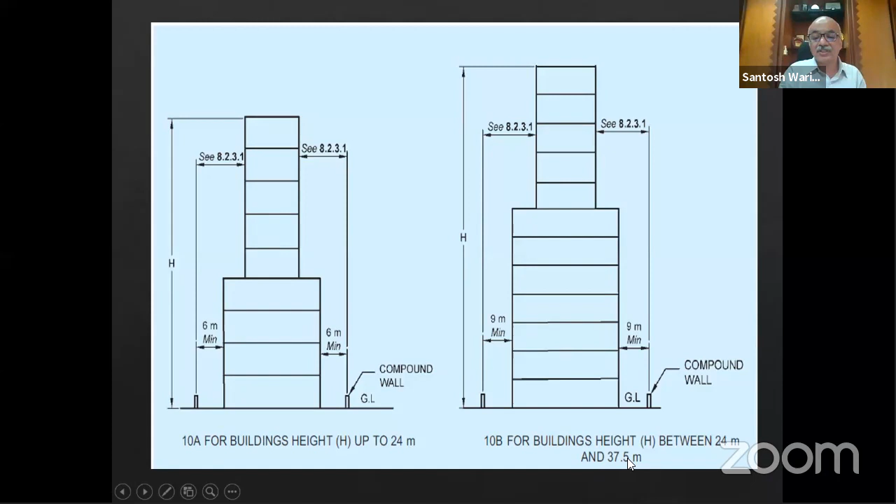If the building height is up to 37.5 meters, minimum ground level 9 meters with one upper level setback. From 37.5 to 70 meters, minimum ground level should be 12 meters with two setbacks - first setback at this level, second setback at this level.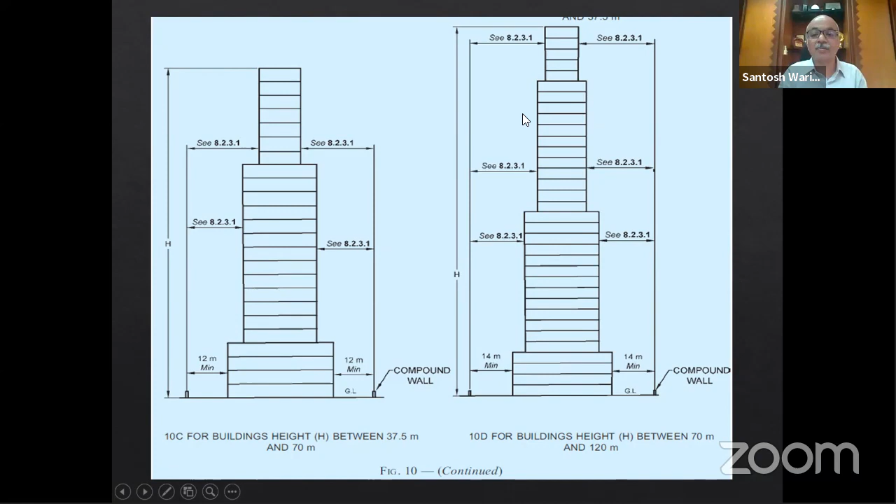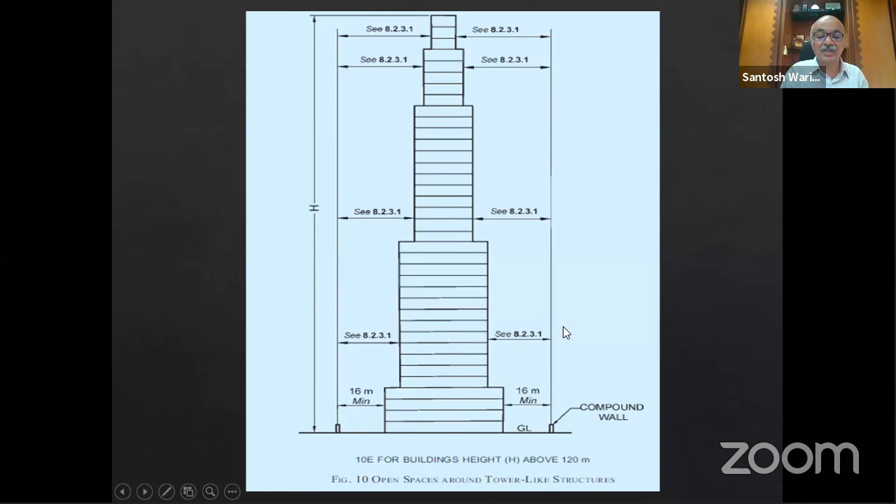You can extend this using H by 3, up to 70 to 120 meters, where you should have minimum 14 meters at ground level with two upper level setbacks. For buildings beyond 120 meters, minimum 16 meters at ground level, with upper level setbacks to meet light and ventilation requirements.

Now for other occupancies, talking about marginal spaces for educational buildings, which are very important nowadays - every school requires fire safety clearance for approval. Every year, CBSE or any school requests local fire authorities to grant approval. For initial stages, the open spaces from all around the school shall be minimum 6 meters.

For institutional hospital buildings, again it's not less than 6 meters, and it shall govern based on height. But for educational and institutional buildings, there's a cap provided in Table 7 that height should not be more than 30 meters. So you have to regulate all developments below 30 meters for educational and institutional buildings.

Now the institutional limit is increased up to 45 meters depending upon availability of various resources, which we'll discuss later. For assembly buildings, the open space in front shall not be less than 12 meters, and other open spaces 6 meters.

Area and height limitations are specified in clause 9 of Part 3. Height restrictions depend upon these parameters, which are clearly mentioned in the code, depending upon the occupancy.

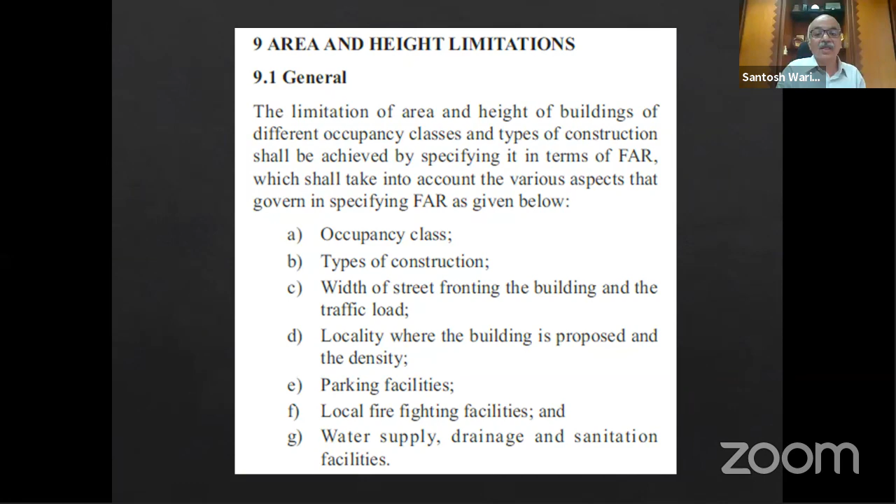Again, there are certain guidelines, as Suresh sir already told, that maximum building height shall not exceed 1.5 times the width of the road abutting, plus the front marginal spaces provided in the building, subject to a maximum of 16 meters. So we have to consider this and allow the building to come up in that area. If the building is abutting two or more roads, then you should follow the greater width regulations.

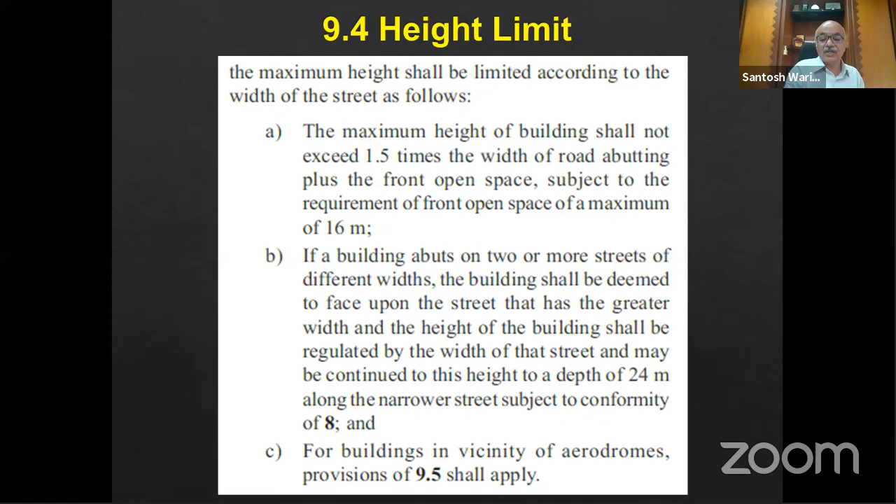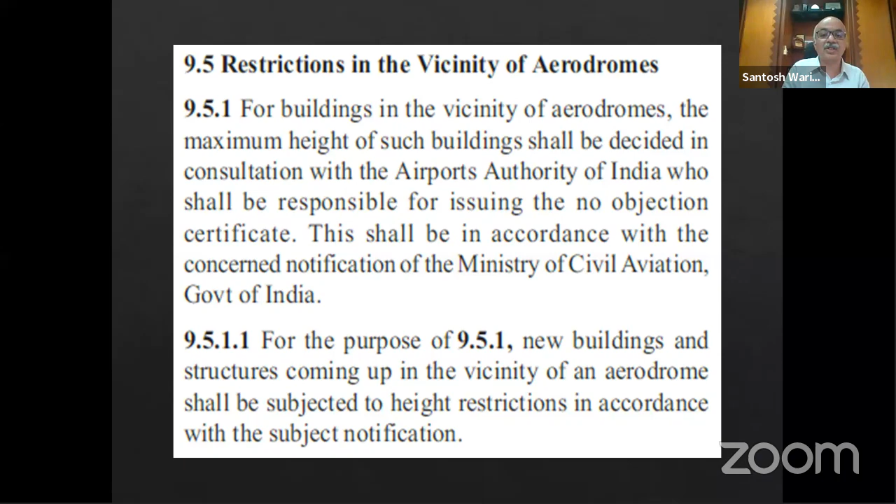Building in the vicinity of aerodrome has some restrictions with reference to aviation rules, wherein the approach and departure path for the aircraft is called a funnel. If your plot falls within the funnel zone, there is a restriction to the building height, and you have to obtain approval from the Civil Aviation Government of India for that particular building height. Every local authority has to follow these rules, and only on clearance from civil aviation can the building approval or commencement certificate be issued for that particular height.

These depend upon type of construction - type 1, type 2, type 3, type 4 - and various kinds of occupancies, right from residential, education, institutional, assembly buildings, mercantile, industrial, storage, and hazardous. So how much FSI can be granted with reference to at least a 9 meter road?

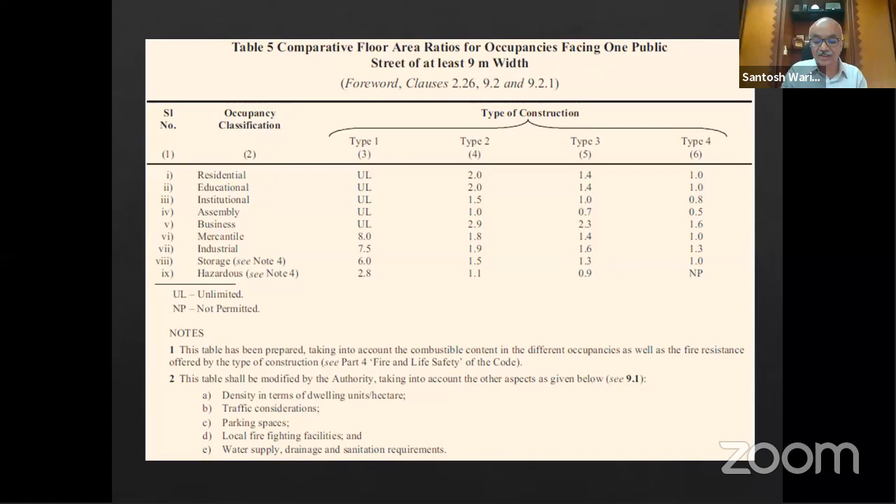As I have told you, various parameters have already been discussed. Based upon that, the local authority can grant higher FSI. So in certain areas, for certain occupancies, higher FSIs are granted. For residential hotels and buildings, up to 4 FSI can be granted, or sometimes more than that also can be granted. But there are guidelines listed in clause 2 under note - density of dwellings, traffic conditions, parking spaces, local fire service facilities, and water drainage. These are the key factors which shall govern the maximum building height, in addition to the road width.

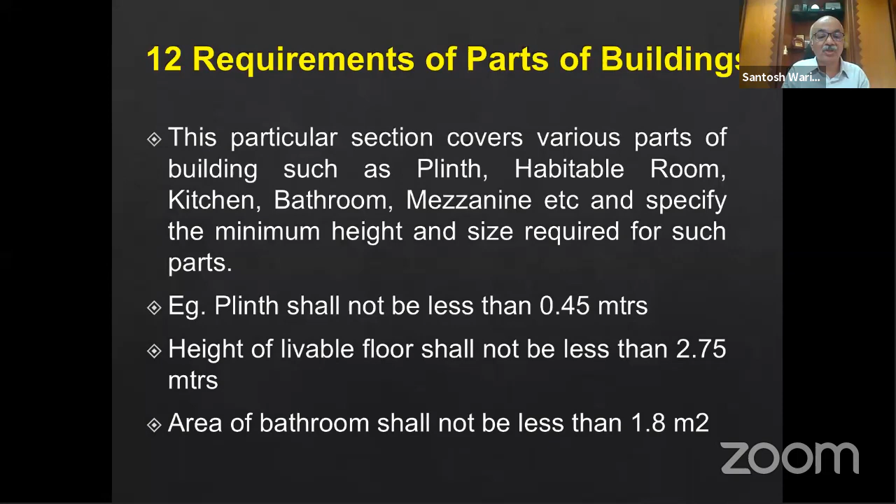The other requirements related to plots and buildings are given in this code, like plinth, habitable rooms - what should be the minimum size of the habitable room, what should be light and ventilation, what should be the kitchen and bathroom sizes, mezzanine floors - then height not less than minimum 2.75 meters for habitable rooms, and the areas of bathrooms.

One important feature from the fire and life safety point of view is the basement, which is a very challenging area in case of fire - visibility is very poor, and it is very challenging for fire services to deal with the basement. So for this basement, various guidelines are issued. The permitted uses for the basement are storage, strong rooms, bank cellars, air conditioning equipment handling, and car parking. These are the provisions made in this rule.

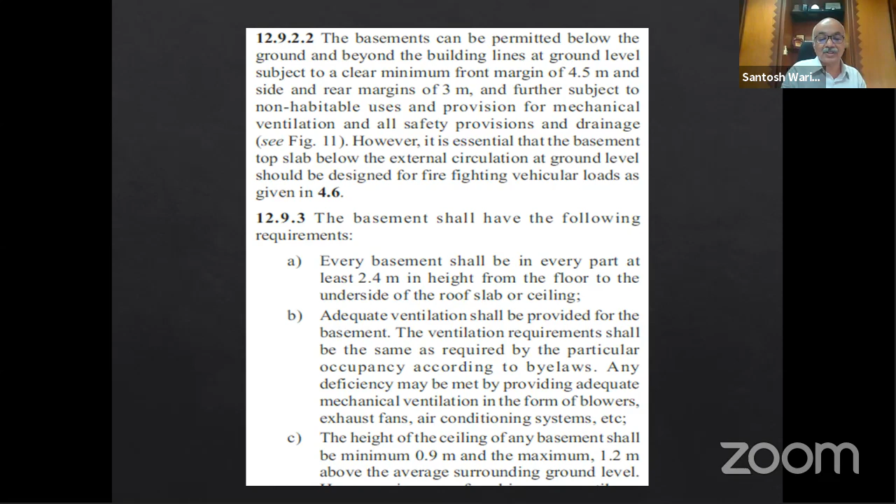Basement can be permitted beyond the ground, meaning beyond the building line. The code specifies how much clearance should be given, and the mechanical ventilation requirement for ventilating the basement. The minimum height for the basement should be at least 2.4 meters from the slab to the ground level, with adequate ventilation as per codal requirements. The basement should come up minimum 0.9 to 1.2 meters above ground, so that in case of everything failing, at least natural ventilation is possible from this 0.9 to 1.2 meter height above ground. This is specified clearly in this diagram.

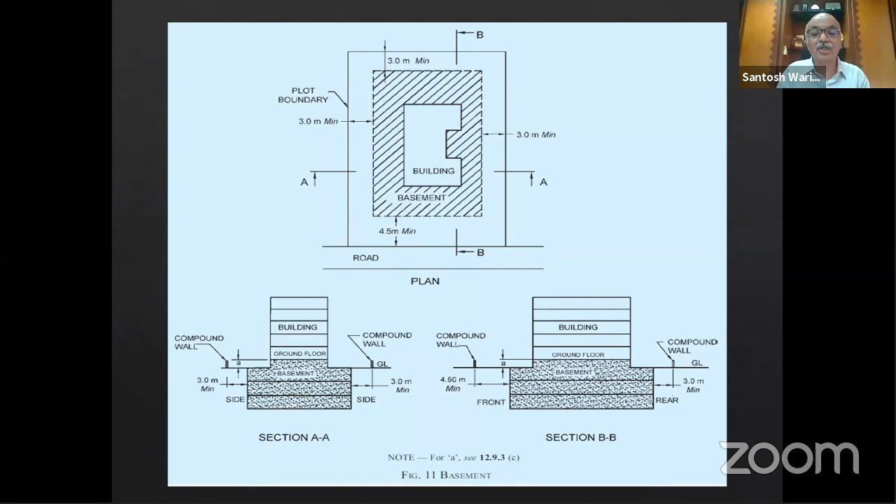So this is my building and this is my basement line. From the plot boundary to the basement line, it should be minimum 3 meters. In case of a front road, it should be minimum 4.5 meters from the road or front compound wall to the basement line. The plinth level, from the ground level to the basement level, should be minimum 0.9 to 1.2 meters, so that natural ventilation is possible, or you have to have cut-off spaces in the basement so you can ventilate it in emergencies, or have a mechanical ventilation system to draw products of combustion out of the basement.

Other important features provided in the annexures of this code: Annexure B gives requirements for accessibility for the built environment for elderly and disabled persons, and Annexure C provides requirements for low income housing groups in cities and urban areas.

There are various slum rehabilitation projects going on in various cities, and these guidelines are very useful. Then there's the special requirement for cluster planning for old cities or where congested housing is there, so you can have redevelopment by combining 2-4 adjacent plots and have a regulated development.

Then there's the special requirement for low income habitat in rural areas to meet the requirement for rural housing, and the special requirement for development in hilly areas. These detailed annexures are provided along with Part 3, which can be used for various types of development. These are the key issues I see in the provisions of Part 3.

Normally these are discussed with the development planners or only architects. They are not discussed in various open platforms, and they get limited up to architects and town planners in the city. Then that should be discussed, because they are very important.

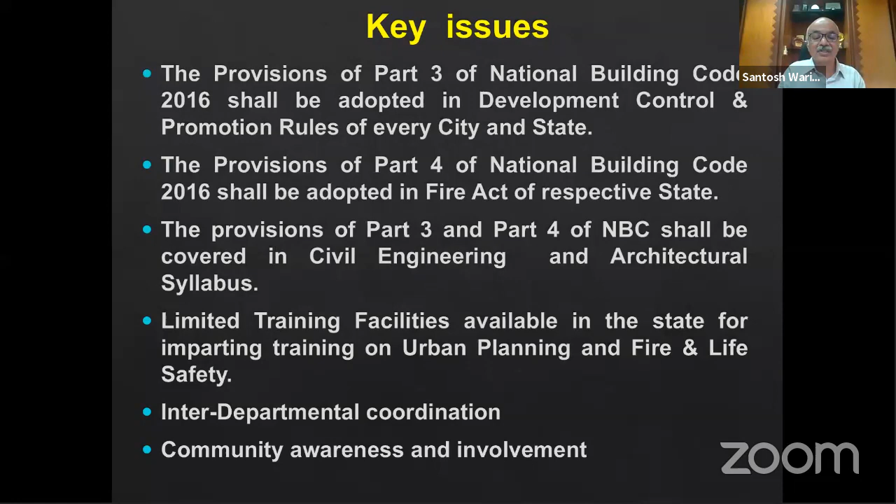The interdepartmental coordination is also a very important aspect. All stakeholders, right from the owner of the plot, developer, then the authorities, municipal authorities or urban development departments, the fire services, architect - they should have better coordination from fire, life safety and livability of the building. And general community awareness is very important on this subject.

So the only enforcement is through various building bylaws, building rules, planning standards, development control rules, fire regulations or fire act, town planning rules, hazard mapping rules, or water supply or drainage.

So all these requirements, codal requirements of Part 3, Part 4 and Part 2, also shall have the cross references in various statutes, so that collectively we can be in a position to give better usability to the building and a better, safer environment.

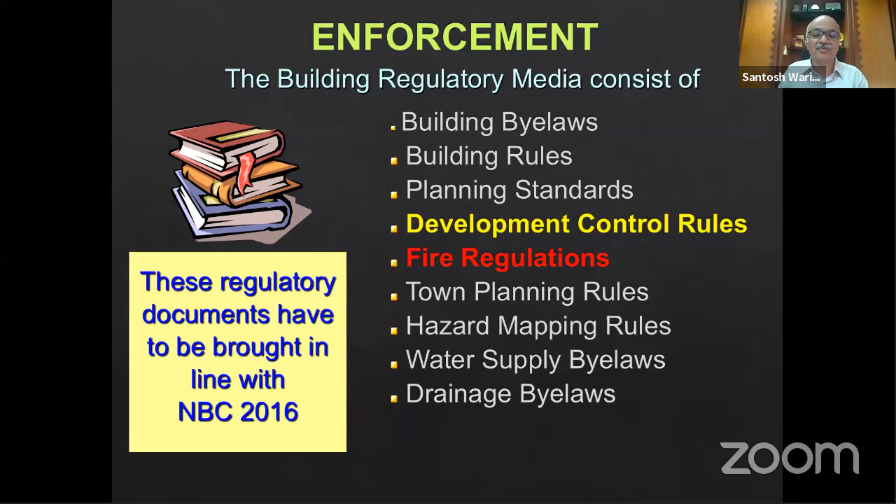So that is all from my side. Thank you very much for the patient listening.

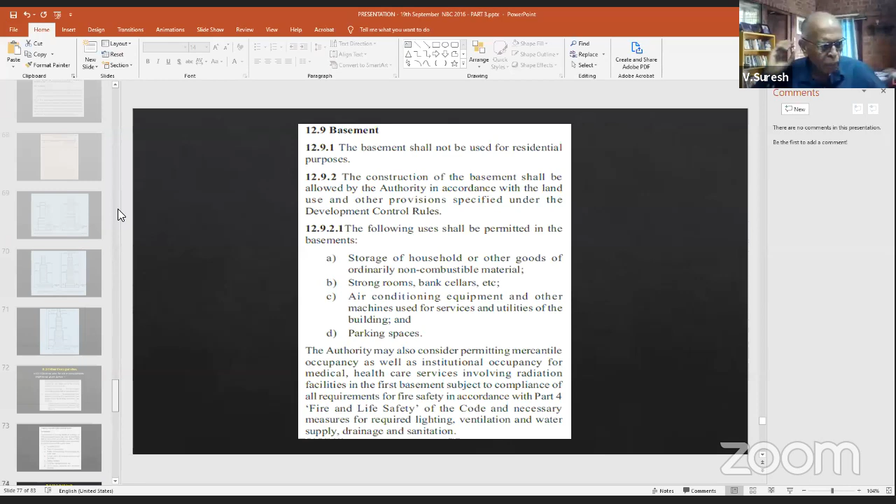But later on, if anybody wants more than that, they can always email me as well as Santosh Warik, and you, of course. You yourself know the topic on that. But otherwise, it's an excellent job done, coming as the Chief Fire Officer of Maharashtra and also the Director of the Maharashtra State Fire Services for all the industrial townships in a large way.

A presentation of this nature - normally they are all experts in Part 4, but for it to come in Part 3, he has done a very creditable job. Santosh, my congratulations to you for a great presentation and for vividly bringing it out through good sketches and explaining those details in a very large way, which should be appreciated equally.

Many people did not even know, I'm sure even now - today, of course, you have a very good audience of over 350 at one point, now about 303. But therefore, for them, this is very important, the link between both the parts.

And why are those provisions written? It's very important for people to understand why provisions are written like that. Sometimes they may not understand. You've given the background to each of them also, why it is done. Therefore, the background behind that - I will stop at this point of time.